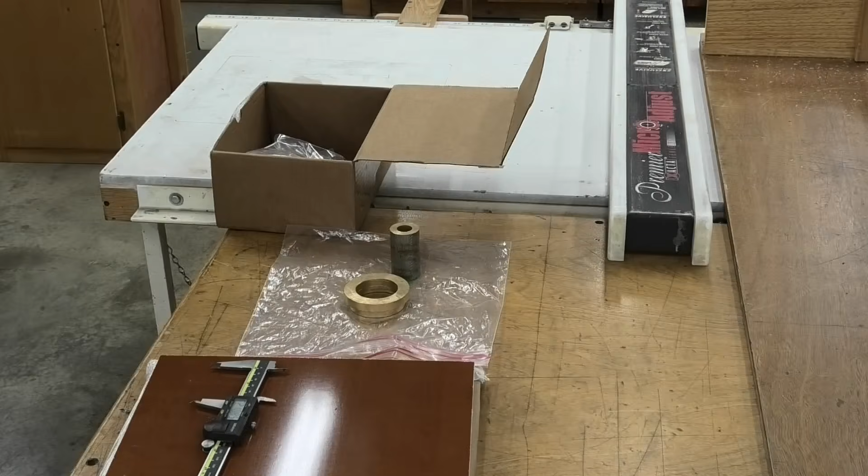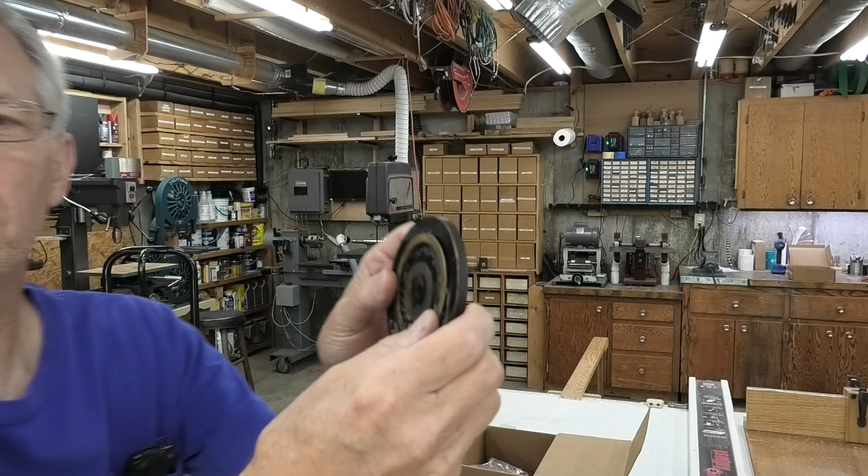Welcome. Well, I'm not sure what I got myself into here, but I'm going to attempt to make this thing right here. It's a piece of phenolic with a couple of brass rings embedded into it.

And it's part of a neon clock, a clock with neon hands. I don't know if I'm going to be able to do it or not, but I'm going to give it a try.

I wish I knew more about it. I don't really understand how it integrates into the clock really well and how it's wired. But I'm going to go ahead and make this for a guy up in Illinois and see what I can do with it. And if he needs some other modification made to it, I will attempt to do it. Anyway, let's get started. I'll throw some pictures up on the screen of what this clock looks like when it's done or put together.

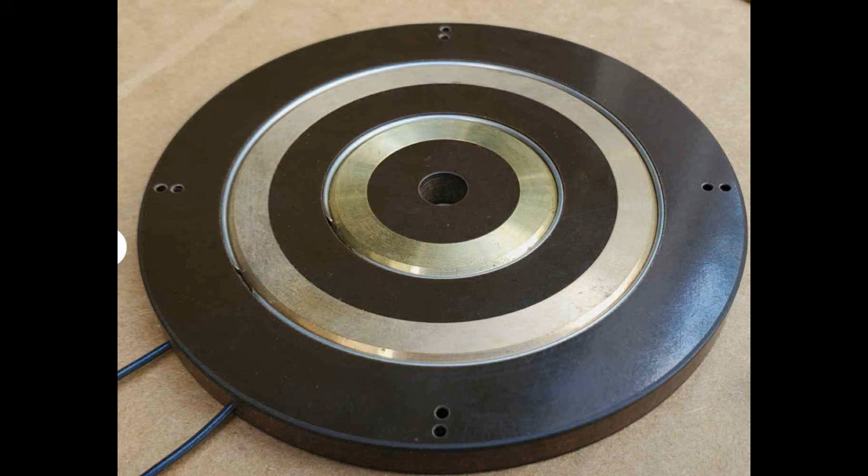I couldn't find any black phenolic. That's all I could find right here. And I talked to the guy that I'm making it for, and he said that was okay. So I'm going to go ahead and cut these first, because I'm really not sure how well this stuff cuts. I'm not going to cut it on my table saw because I suspect it'll dull the blade pretty good.

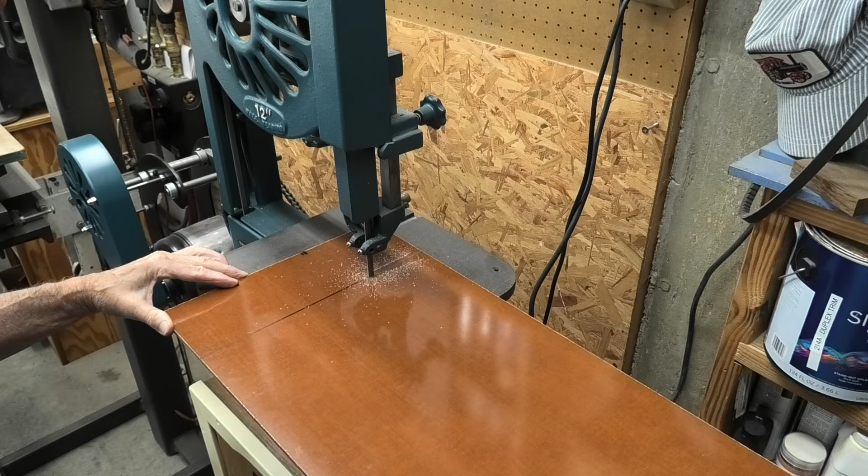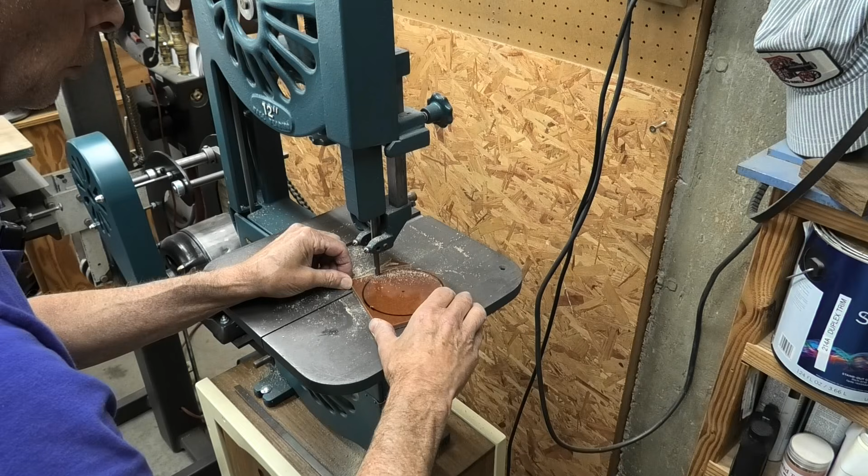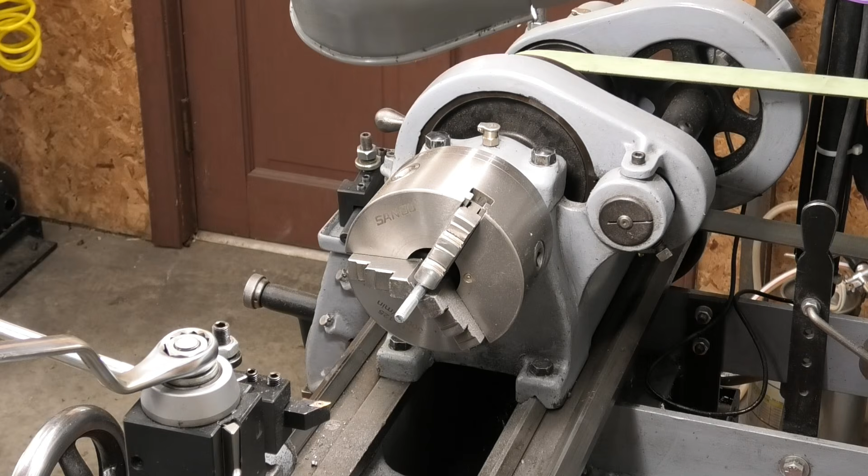Okay, I got a 5/16 bolt in here, and the hole in this thing is some kind of odd size. It goes on a clock drive, so it might be metric. The rest of it's inch based. I think I can turn it down and have enough threads here to use this as a mandrel.

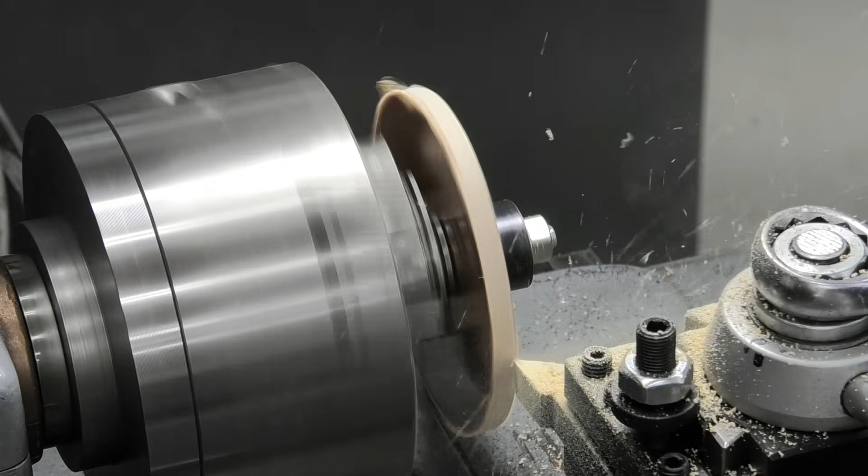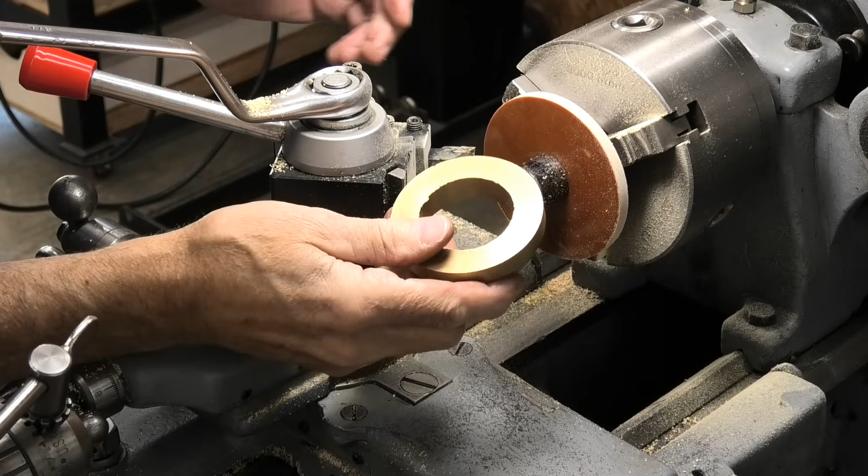Okay, I've got these scraps of brass right here that I'm going to turn down to that diameter inside and out, and then part them off, part these rings off.

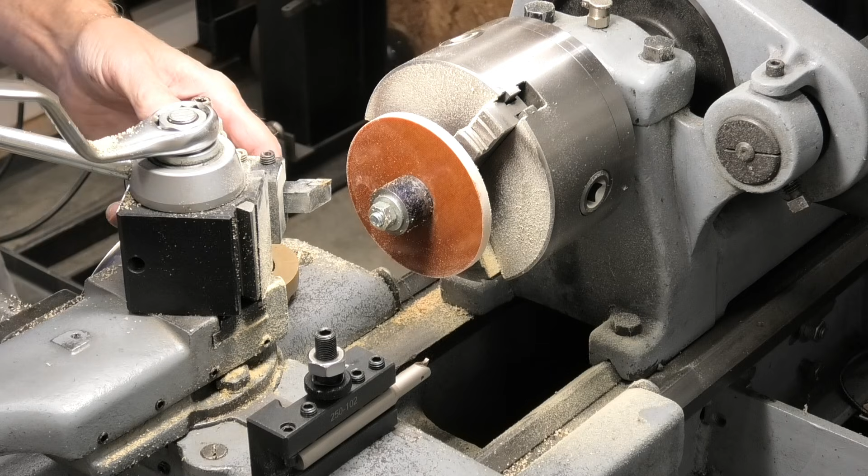Well, I've got this trepanning tool. Oh, I think I'm saying that right. I showed it in another video. I've never really used it though. And I'm going to use it as an indicator because that's what I'm going to cut the grooves with.

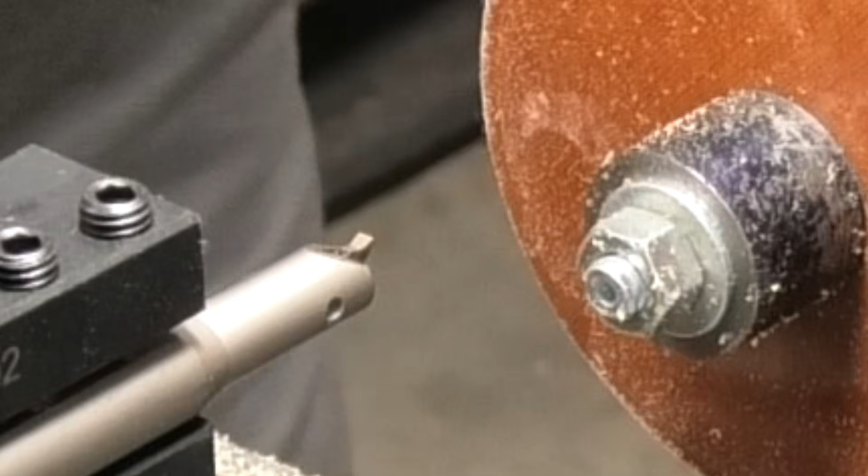What I got to do is take into account the width of that tool. 80 thousandths, probably a metric.

I ran into the nut with my trepanning tool. It's going to be very confusing, but I'm going to have to do this in reverse. Don't like doing that.

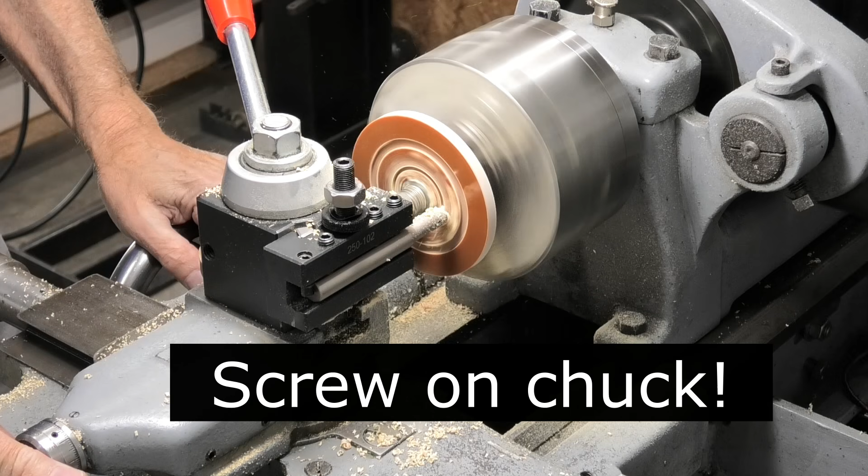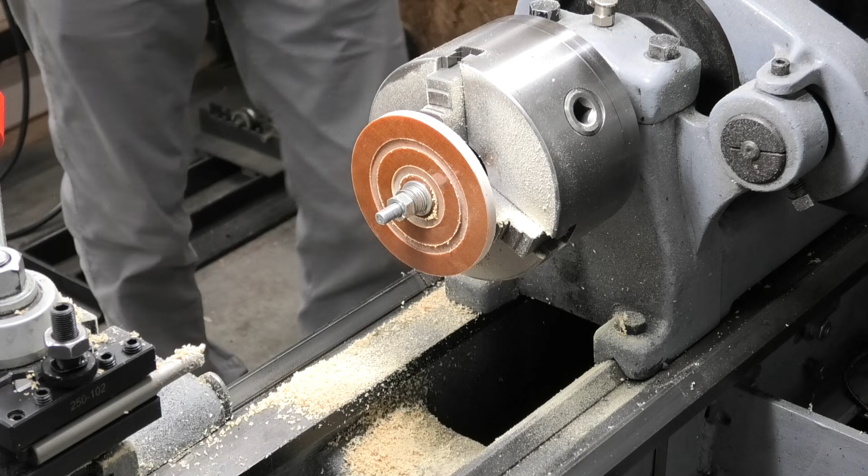Well, that looks right. This would almost be worthwhile setting up on my wood lathe for CNC.

Okay, it worked good on the lathe, and I got to make several of these, and I'm afraid of getting that repeated exactly right, and that's pretty important. If I had a DRO on the lathe that I could set 2 memories on, I could probably do it and do it really well. But I don't want to take a chance on messing up on reading my dials.

Anyway, I put it on my CNC lathe, and you can see what happened here. I got a narrow slot and a wide slot. And it's something to do with the programming for my lathe and trepanning, and I don't know how to fix it. I tried several times, and it didn't work. So we're going to take a new approach. We're going to do it on the rotary table.

I got a 5mm end mill, and that's just about the exact width of the slot in the original. So it's going to work good, I think.

Okay, I've got the rotary table set up here with a chuck in it. And I put a 1/2-inch pin in here, and I used the half function on my DRO and touched off on each side in each axis and got it centered. This may not be the most accurate way to do it, but it's fairly accurate and plenty accurate for what we're doing here.

The biggest thing on this particular item is repeatability. So I've got my DRO centered or zeroed out on center. So I've got to put a mandrel in the middle of that chuck, which is nothing more than a bolt that's been turned down a little bit for that hole size in here. And I don't know what size that hole is supposed to be, but I got it as close as I could. It's one size under 5/16, whatever that is. And it's not metric as near as I can tell.

I don't usually use this collet holder. This is an ER40 collet holder. It extends the distance from the spindle of my mill, so it makes it less rigid. But I don't have any metric collets, and this is a 5mm. And this is pretty soft anyway. It's not going to be an issue.

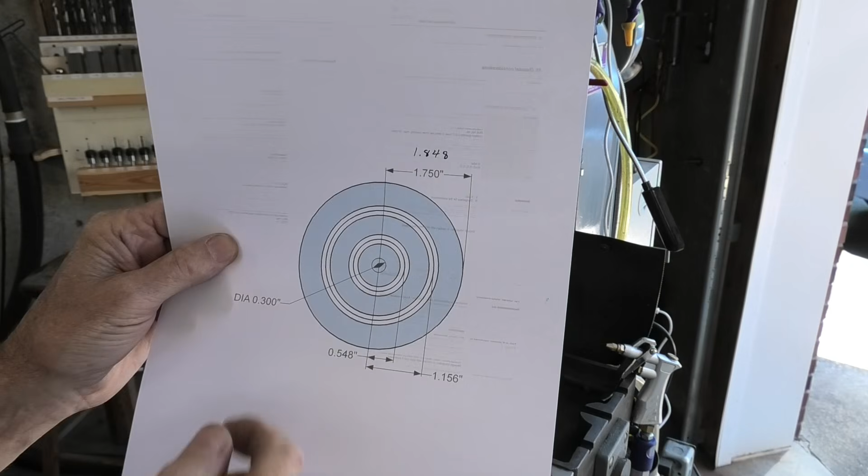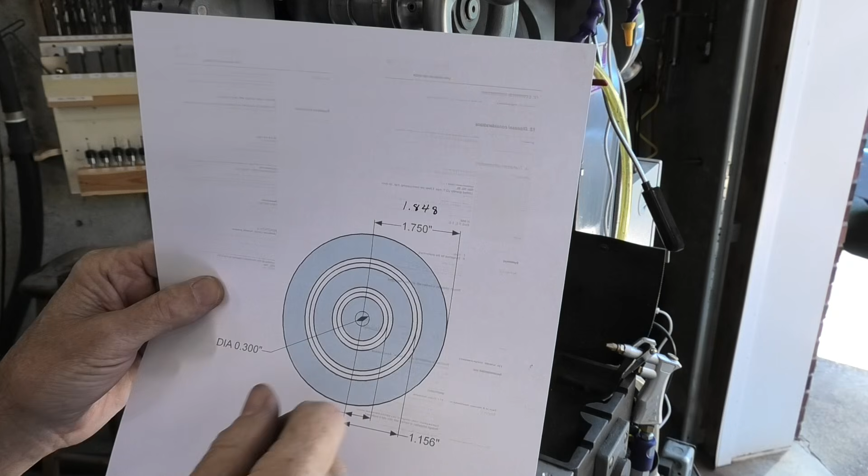Okay, I drew this out so that from center to the center of the slots are these dimensions right here. And I screwed up here. I'm going to go ahead and trim it around with the same end mill. I was going to make it round first, and I thought, well, I'll just cut it with the end mill. But I had to add 1/2 of 5mm right there to that final dimension to compensate for the diameter of the end mill.

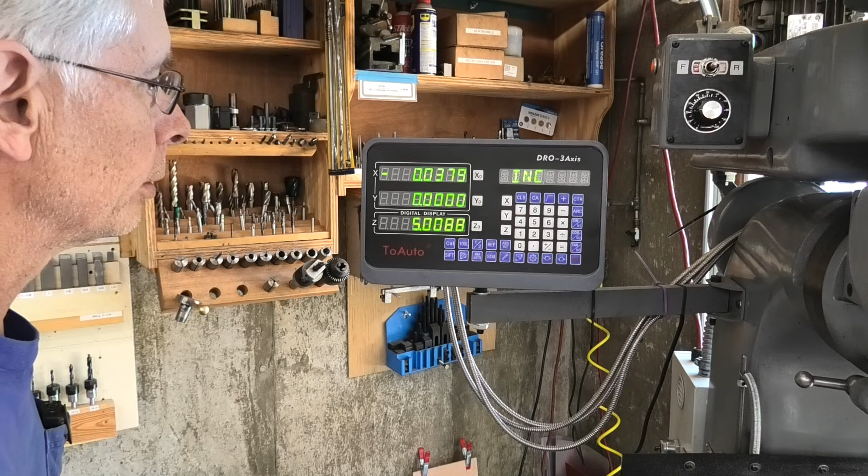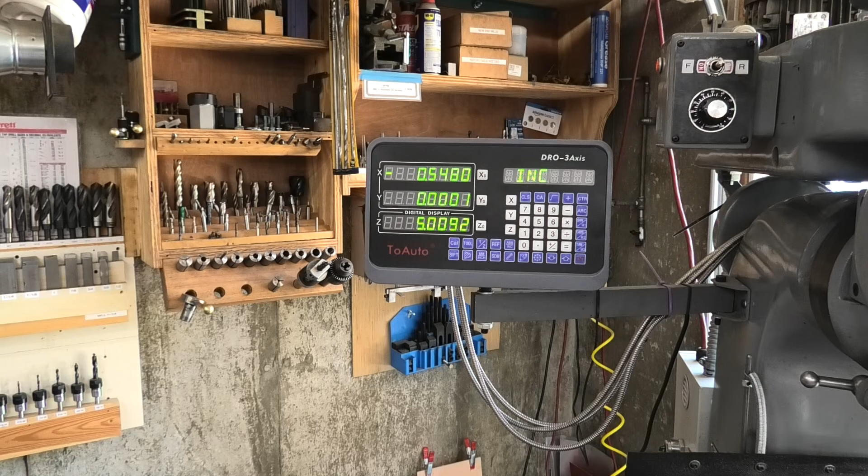I got my Y-axis locked in, and I'm going to use the X-axis for everything. So the first thing we got to do is set it to 0.548. There we go, right there. I think it'd be better to cut all the smaller diameter slots, cut all these first, and then cut these. It's a lot of work doing that, taking them on and off, but I think it's more accurate.

Okay, for some reason, this is something I don't care for on this Wells Index. It doesn't have a really accurate depth stop on the quill. So I'm going to use the knee for setting the depth of cut. Touch off here. Okay, right there I'm touching.

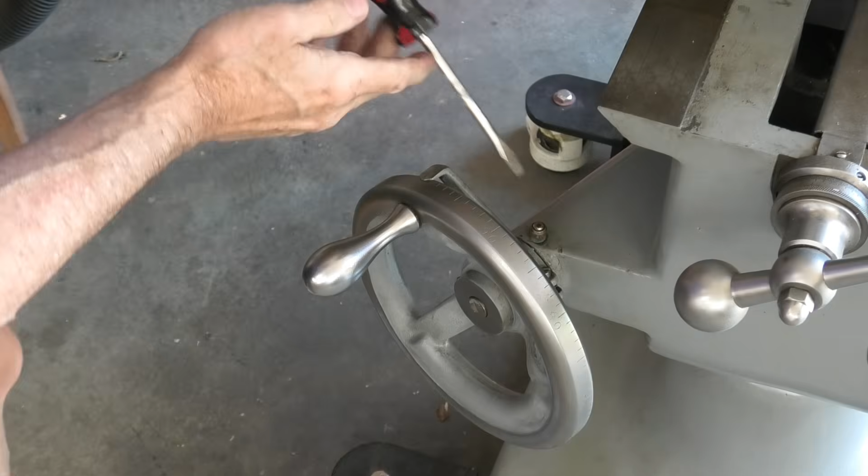There's a lot of things I do like about this Wells Index, and this is one of them. The hand wheel's got graduations on it and a resettable marker, and I can quickly go to 60 thousandths on this, no problem. The DRO is kind of touchy. That's pretty easy there. Okay, if I didn't mess something up here, this should work good.

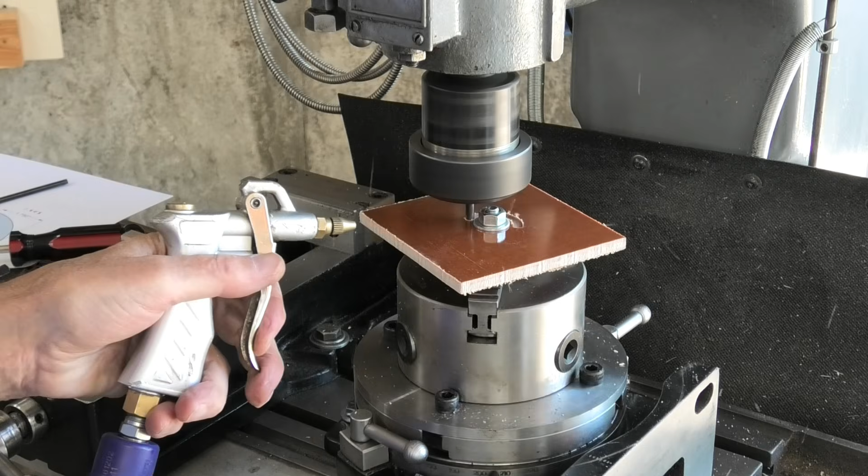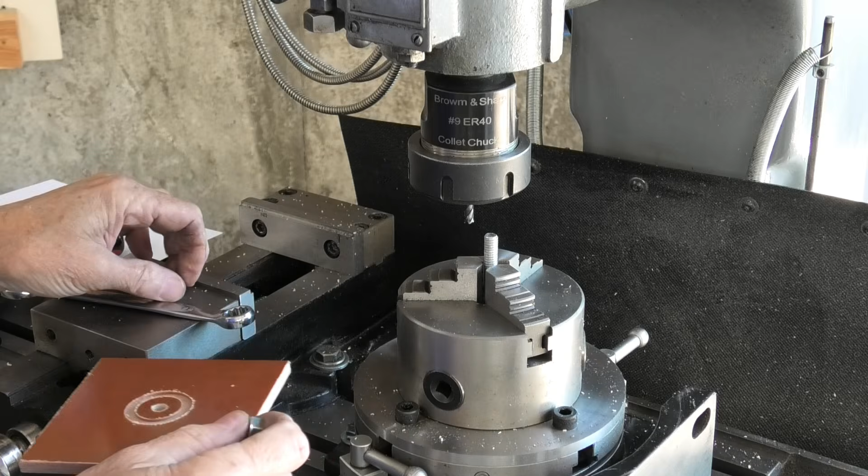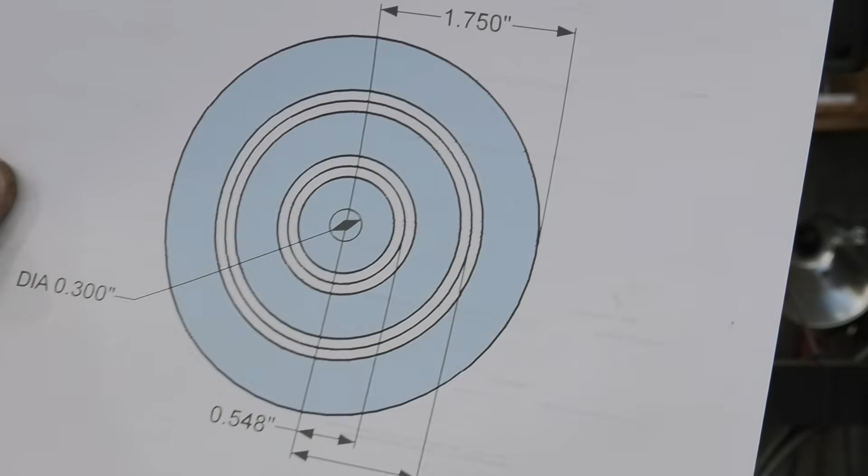Well, it looks pretty easy. Time consuming, but okay. Excuse me. Now we got to go to 1.156.

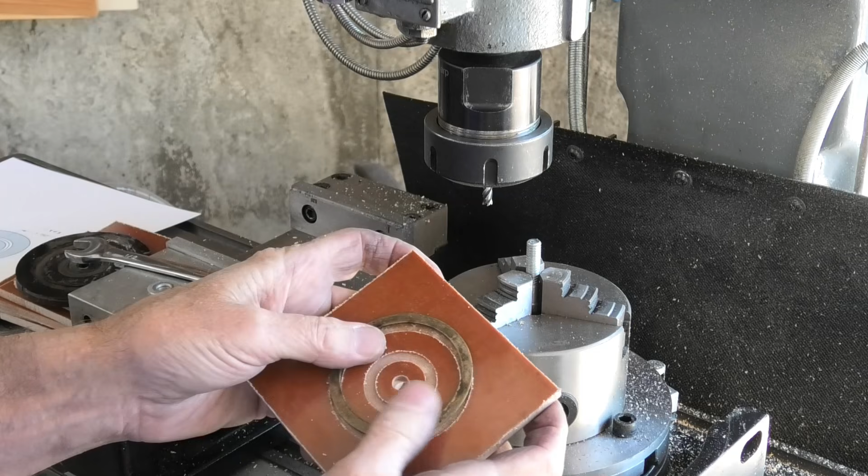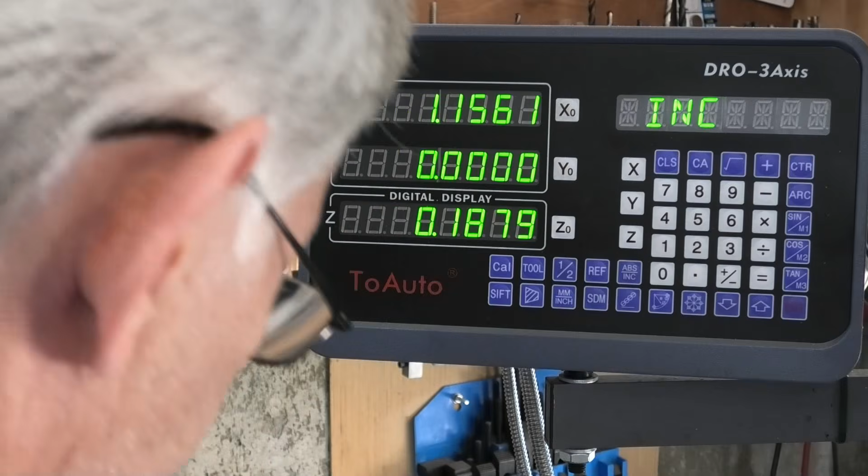Okay, here's the original ring. My groove is very slightly smaller, but close enough. Remember, we haven't made these yet. Okay, let's make this thing round. Need to move to 1.848. I found out that locking these, or partially locking the table, makes it cut a lot smoother.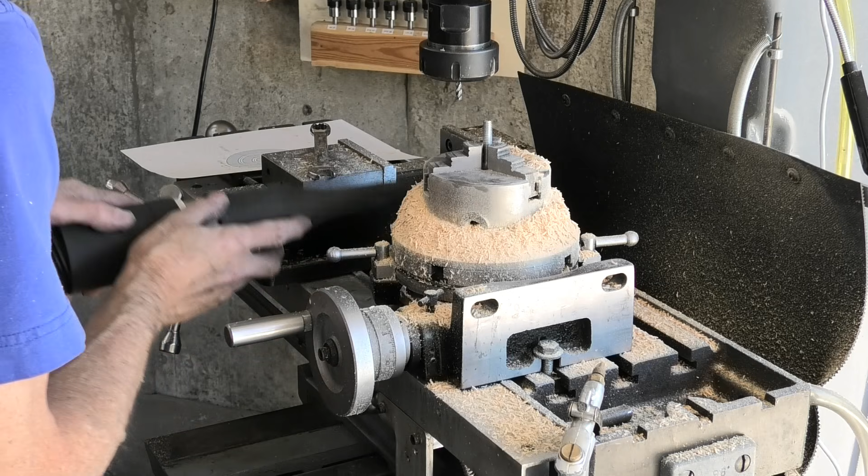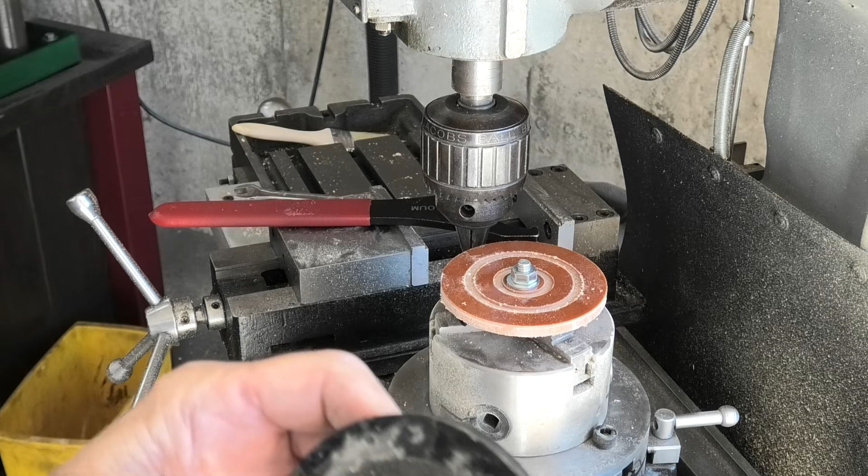Okay, what we're going to do now is drill these little holes right here. I don't know if you can see them, they're right there. Two little holes, and there's 4 of them. There, and there. 4 sets. And I think it's where a little wire goes through and it holds the neon hands to the clock, to this disc. Probably not very critical. Gonna be time consuming drilling these though.

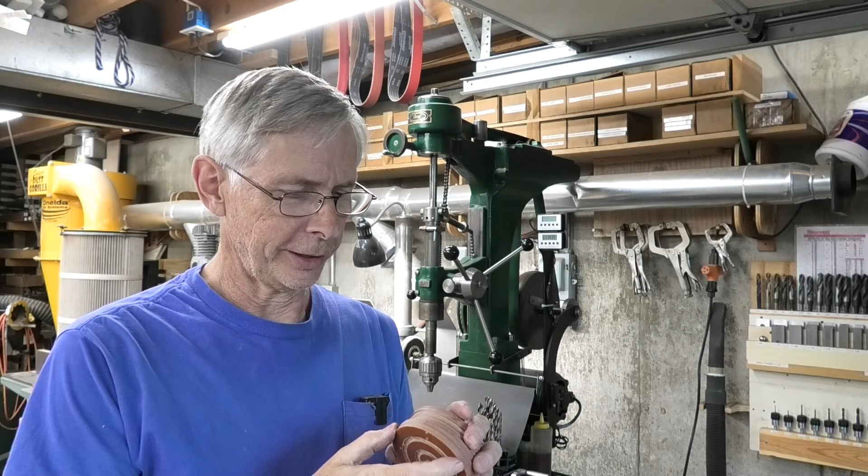That wraps it up for this week. Having to get some information. Apparently these brass discs that insert into these slots have to be connected to each other from side to side, and then wires coming out the side to energize those discs. It's going to be a big ordeal making these things. I'm getting into a little more than I bargained for here.